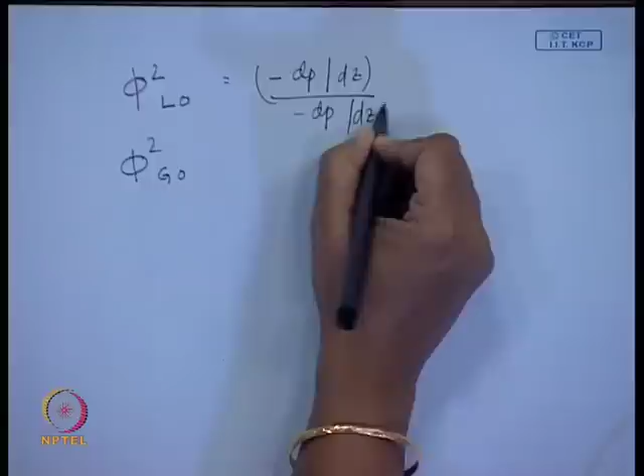The first one was phi square LO. Remember, these subscripts we usually use as capital letters. Then there was phi square GO, usually used in terms of liquid. This is minus dP/dz divided by minus dP/dz when the entire mixture flows as liquid.

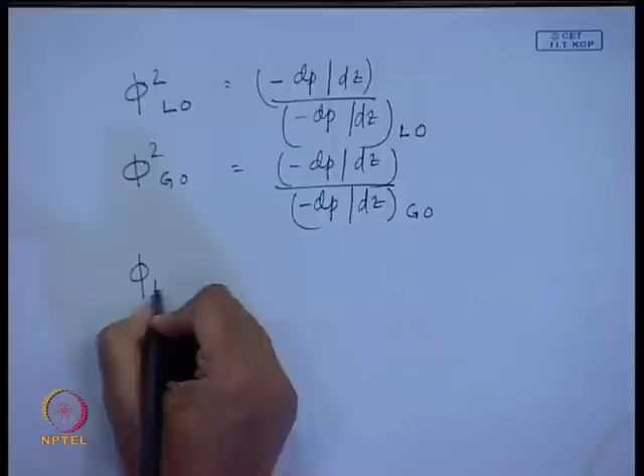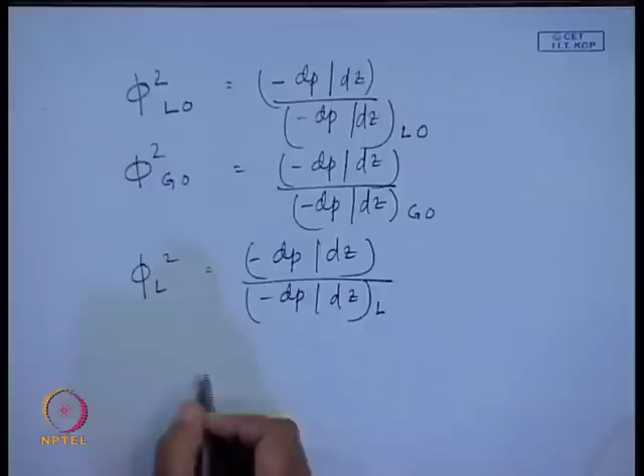Okay, then this was just from analogy, this was as a ratio of the entire mixture flowing as gas. And then we had phi L square, where the liquid portion of the mixture is expressed as a ratio of the liquid portion of the mixture flowing alone in the pipe, and phi G square, which is the gas portion of the mixture flowing alone in the pipe. So these were the 4 definitions that we had already given.

Now, at this particular juncture, I would like to mention that usually these correlations are expressed in terms of phi L square and phi G square. The basic assumptions on the basis of which the empirical relationships to find out the frictional pressure gradient are based include: constant but not necessarily equal velocities for gas and liquid phases, attainment of thermodynamic equilibrium between the phases, and use of empirical correlations or simplified concepts to relate the 2-phase multiplier as well as void fraction alpha to independent variables of flow.

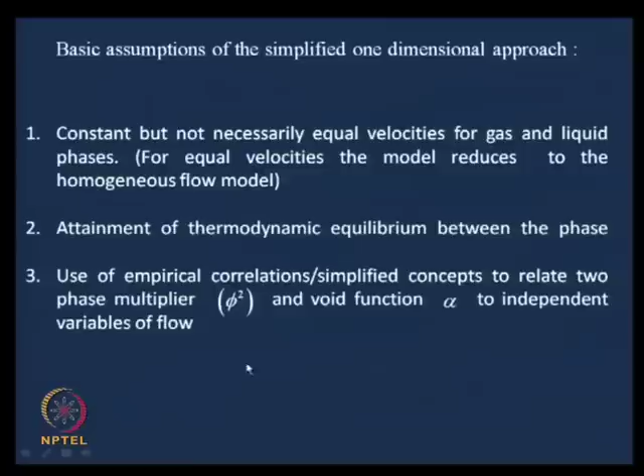So first we would like to relate the 2-phase multiplier, and naturally if the 2-phase multiplier is related with that particular parameter, alpha should also be related. Accordingly, we will find out empirical correlations to relate the 2-phase multiplier as well as the void fraction to independent variables of flow. Once this is done, we find that the frictional pressure gradient can also be calculated, and once alpha is known, rho Tp can also be calculated, u1 and u2 can also be calculated. So the frictional pressure gradient can be obtained from this particular equation.

Now here I would like to mention that out of the 4 definitions of phi square which we have written down just now, usually we adopt phi L square and phi G square, rather we correlate phi L square and phi G square for our purpose. We do not use phi LO and phi GO usually; those are used when we encounter change of phases or when there is boiling, condensation, etc.

When a single phase, say liquid, a saturated liquid or a saturated vapor is entering and change of phase occurs, under that condition, if we take phi LO square, phi GO square, it is much more convenient, because the liquid or the vapor was flowing alone in the tube at the entry condition. But under normal circumstances, when we are developing the 2-phase multiplier correlations from the separated flow model, we assume from the very beginning that both phases are present. In that case, we have found that it is much more convenient to use phi L square and phi G square. Why is it more convenient?

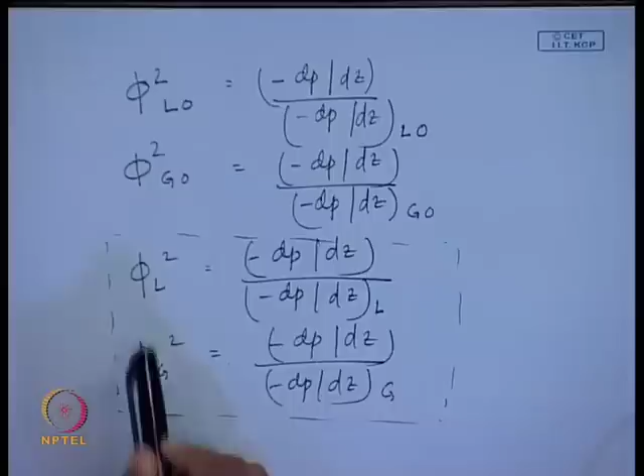Because we will soon see that these 2 multipliers conform to certain limiting conditions which are not obeyed by phi square LO and phi square GO. Just because of that, we would like to prefer, or we would like to correlate phi L square and phi G square. Now what are those limiting conditions? Let us see what are those limiting conditions.

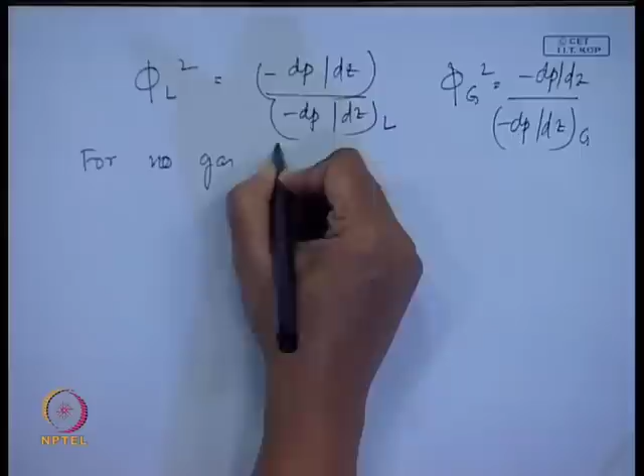Now, for no gas flow, what will you get? Let me write down the definitions once more. Phi L square equals minus dP dz by minus dP dz liquid, and phi g square equals minus dp dz by minus dp dz gas. Now tell me, for no gas flow, what will you get? What should be the value of phi L square and phi g square for no gas flow?

What is 1 by phi L square equal to for that particular case? Only for no gas flow, meaning only liquid is flowing. So 1 by phi L square will be equal to, since only liquid is flowing. So therefore, these are all two phase pressure gradient. Here also I would like to make the changes clear, they are all two phase pressure gradient. I am very sorry, in case I miss it, just remember that they are all two phase pressure gradient.

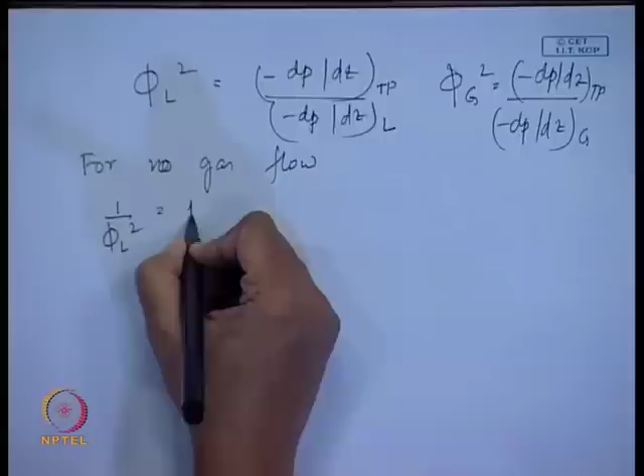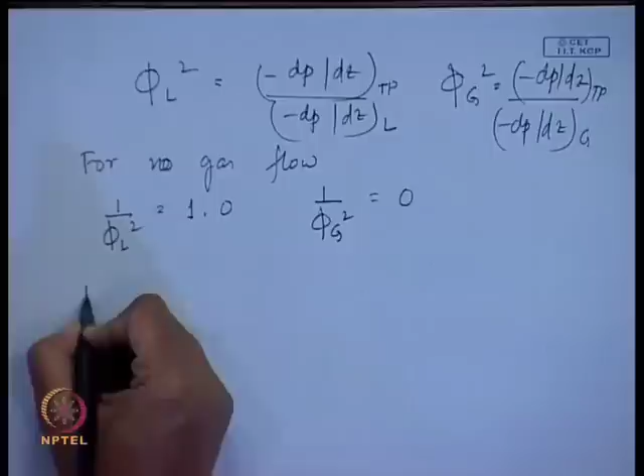Now, when there is no gas flow, naturally it is only liquid which is flowing through the pipe, isn't it? So therefore, under that condition, 1 by phi L square becomes 1.0. And what about 1 by phi g square? It becomes 0. Just for this reason I have defined them not as phi L square, phi g square, but as 1 by phi L square and 1 by phi g square. Similarly, for no liquid flow, I also have these cases in my presentation.

You can see the PPT which I have prepared. Here also for no liquid flow, naturally what do you have? It is 1 by phi g square equals to 1, and 1 by phi L square equals to 0.

Remember, these are limiting conditions which phi LO square and phi GO square would not have conformed to. When there was no liquid flow, we would find there would be some value of phi square LO, because we assume the entire mixture is flowing as liquid. So when there is no gas flow, the liquid flow would be there. Such limiting conditions would not have been subscribed by your phi square LO and phi square GO.

Another limiting condition that is also obeyed by this is the relationship between phi L square and phi g square at the critical point. All of you know what is the critical point? What happens at the critical point? The two phases cannot be distinguished at the critical point, that is the definition. Why does that happen? Rho 1 becomes equal to rho 2, mu 1 becomes equal to mu 2, and therefore all the properties of the two phases become identical. Now let us see how the relationship between phi L square and phi g square change at the critical point.

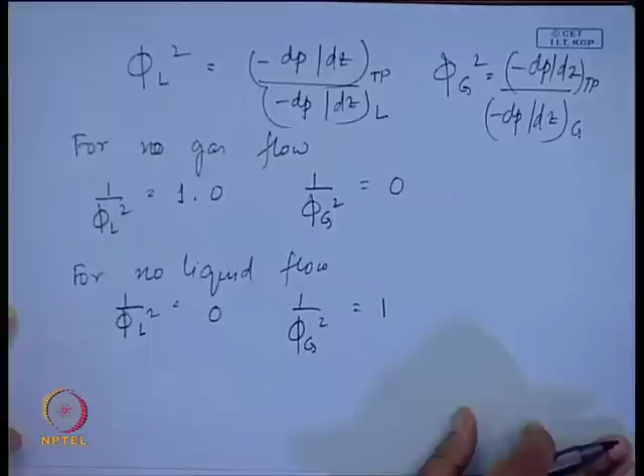Now what is the basic definition of these two? Let me complete it. This was 1 by phi L square equals to 0, and this was 1 by phi g square equals to 1. Now at the critical point, what do you get? Let us first find out the expression, and then we will be substituting the expressions for the critical point.

So what is the definition of phi L square? It is, as I have just now written down, the two phase pressure drop divided by the pressure drop when the liquid flows alone in the pipe.

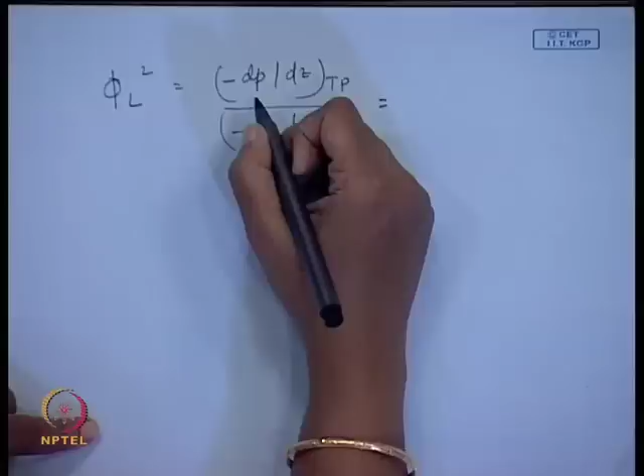Now if we substitute the basic definition, there is one more thing I had forgotten to mention. These empirical approaches have been derived under certain conditions: no phase change, no acceleration pressure drop, and negligible body force effects. That means for a horizontal pipe under isothermal two component flows. Do you agree with me? It has to be a horizontal pipe under two component isothermal flow.

Yes or no? So if that is the case, then your g cos theta term cancels out. There is no acceleration pressure drop, this term cancels out too, and therefore under that condition your pressure gradient comprises only of the frictional pressure drop. So these correlations, most of the empirical approaches, have been developed under conditions of no phase change, no acceleration pressure drop, and negligible body force effects, under which we can write it down.

Under this condition we can write minus dp dz two phase. This comprises of minus dp dz frictional component of the two phase. Later on some modifications were made to incorporate effects when body force effects and acceleration pressure gradients become important, but naturally, the more important they become, the less accurate these correlations become. So under this particular condition the correlations were developed.

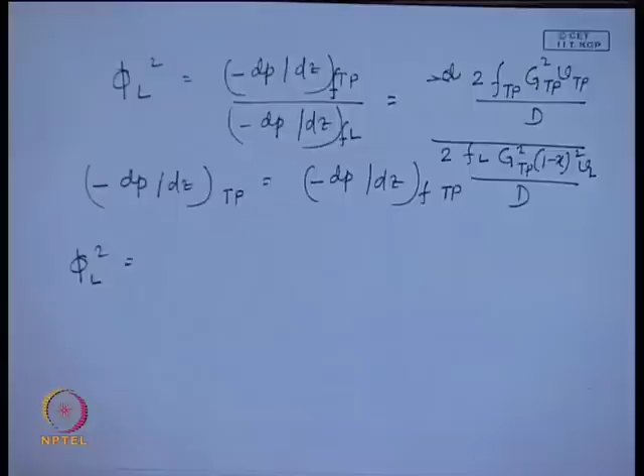Fine. In the same way, your minus dp dz frictional for the gas phase can also be expressed similarly. So we find the expression of phi L square when these assumptions, which I have written down in my transparency, are applied. Under these assumptions, these terms cancel out, and d cancels out. So this reduces to FTP Vtp by FL into 1 minus x square VL, yes or no?

Is this portion clear to all of you? Fine. Now, at the critical point, what do you get?

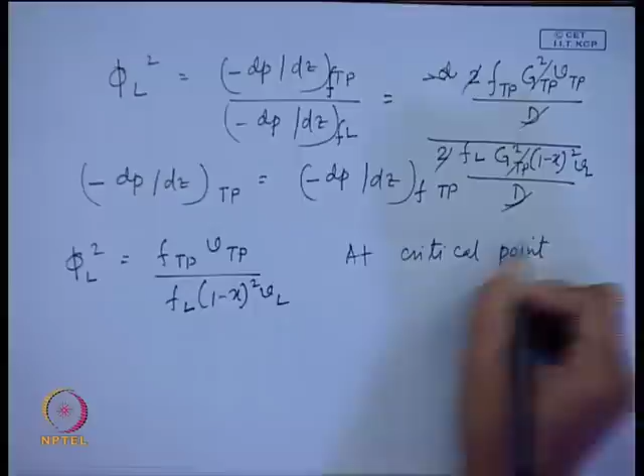At critical point, what do you get? Rho 1 equals to rho 2, or V1 equals to V2, isn't it? So, therefore, VL equals to Vg equals to Vtp, yes or no? So, therefore, these two also cancel out. Do you get this?

Right, so therefore this becomes FTP by FL into 1 minus x whole square. Now, what is the expression of FTP? Can you tell me? This FTP, this is a function of...

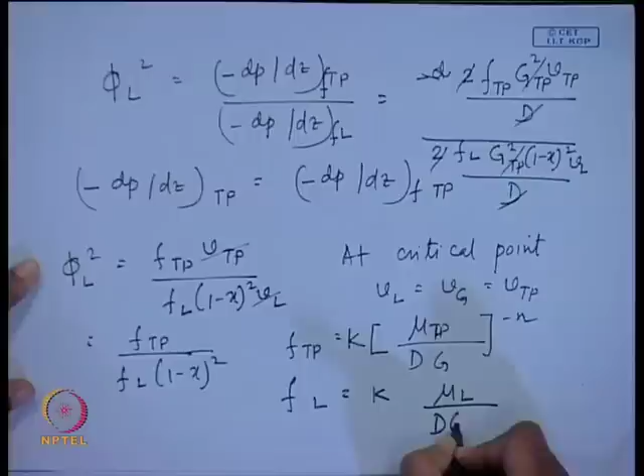Reynolds number. Okay, so therefore this becomes a function, or this is k mu Tp by dg whole to the power minus n. You agree? Same way FL, this is equal to k mu L by, we can write it in this dg into 1 minus x whole to the power minus n, yes or no?

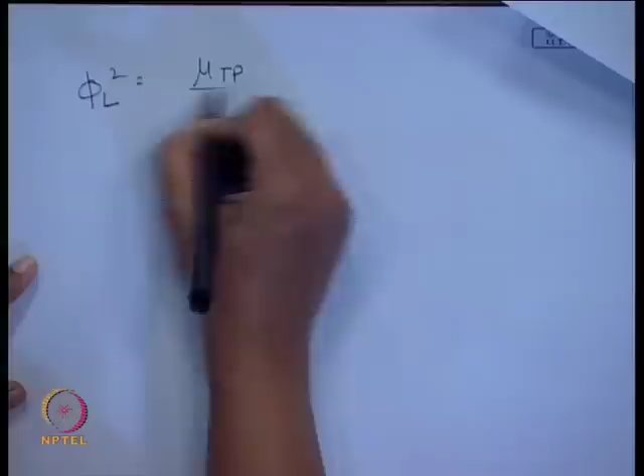So, therefore, here we can write it down as this is equal to - I have to shift to the next page - this is equal to phi L square, this is equal to mu Tp by dg whole to the power minus n, divided by mu L by dg into 1 minus x whole to the power minus n, 1 minus x square. This is the relationship which we get.

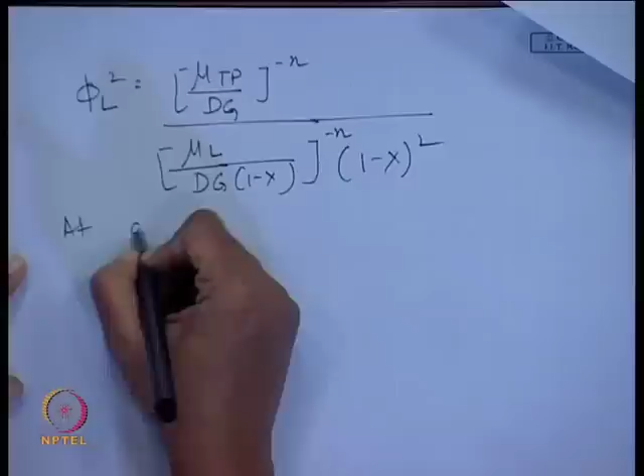Again at the critical point, we know mu 1 equals to mu 2 equals to mu Tp. So, therefore, at critical point what do we get? Mu Tp's, the mu's cancel out, dg they also cancel out. Okay, fine. So, what is the final expression that you get for this particular case?

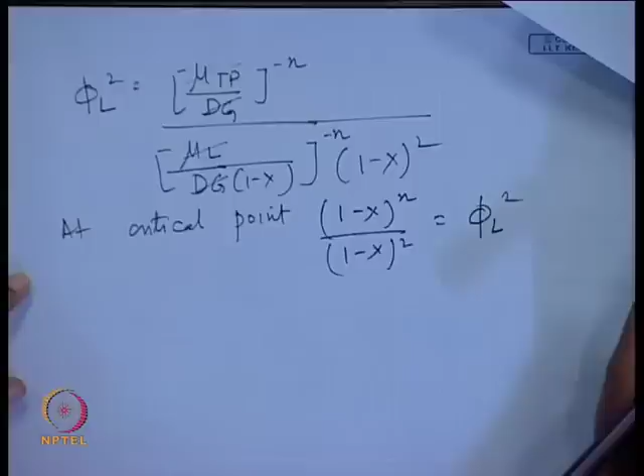It is 1 minus x whole to the power n by 1 minus x square. This is equal to phi L square. Yes or no? Just check up whether I am doing things correctly or not. Similarly, phi g square, what will you get? For phi g square, it is going to be x to the power n by x square, will be equal to phi g square. So we find that phi L, the relationship between...

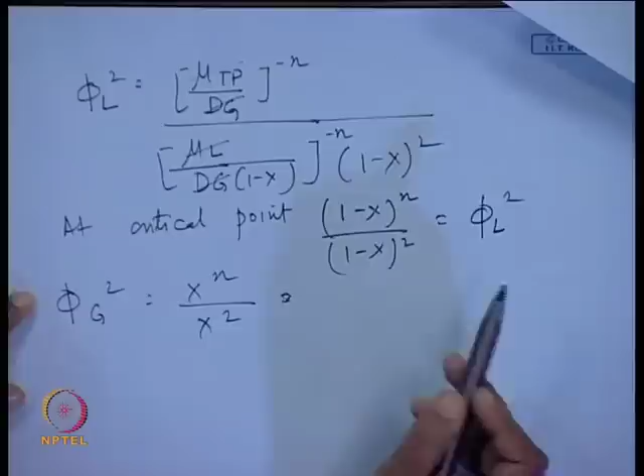Minus - what happened? It is all right only, isn't it? Oh sorry, now here also I made this mistake, isn't it? Minus n, sorry, very sorry. Okay, in other words, you can just write it down as minus n plus 2.

Okay, so therefore what do we find? That the relationship between phi L square and phi g square, at the critical point, will depend on whether the flow is laminar or turbulent. Because we find that both at the critical point, the phi L square, it is a function of x and n, isn't it? And in this particular case also it is a function of x and n. So, therefore, the relationship between phi L square and phi g square at the critical point will depend upon whether the flow is laminar or whether it is turbulent.

If it is laminar, then what do we get? For laminar flow, n equals to 1, very correct. So, therefore, phi L square will be equal to - come on - phi L square, it is going to be 1 minus x, 1 minus x only, whole to the power minus 1. Check it up, check it up.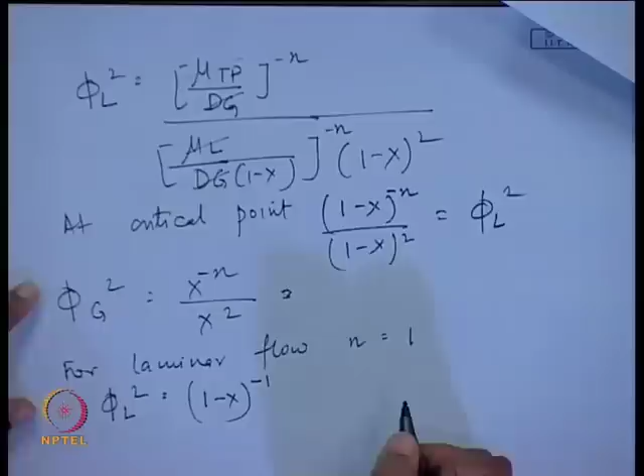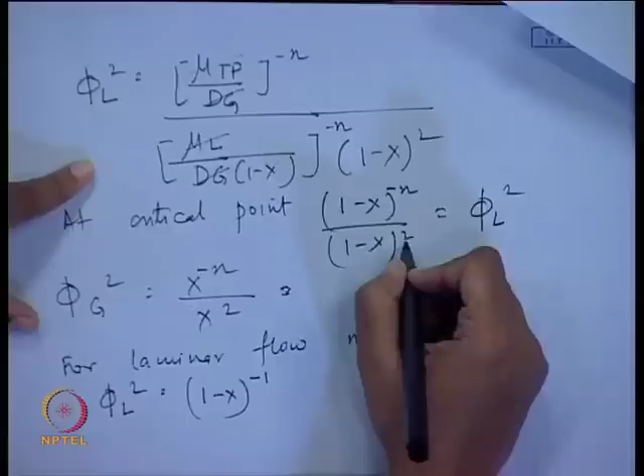How can it be minus 3? Just check it. N is 1, so therefore this is 1 by phi L square if I make it, then in that case, okay, let me make it 1 by phi L square, then this is going to be 2. Just then probably I have made a mistake, let me just check up, maybe somewhere there is a mistake which I have made. FL by FTP, what did I get?

There probably I have made a mistake. So suppose I start from the very beginning for the laminar flow, then this becomes minus 1. Suppose for laminar flow, if I start from the very beginning, okay, so phi L square becomes - this is minus 1, this is minus 1 - and then in that case we get f by FTP. In this particular case, what do we get? FL by FTP, this is equal to 1 by 1 minus x, very correct. Okay, and in the same way, we will get - just a minute - where FL by FTP, next page. Oh, here, no?

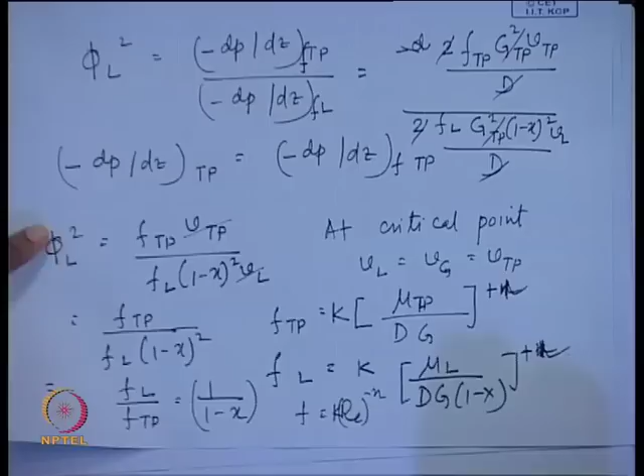No, here only I had made a mistake. Sorry, very sorry, here only I made a mistake, just a minute. This FTP equals to K RE to the power minus n. I have written 1 by RE, there only I had made a mistake. This is 1 by RE I have already written, so therefore it has to be plus. None of you pointed out the mistake. From here itself I had started making the mistakes. So, therefore, this has to be plus n. Is it correct? Because the relationship is f equals to K RE to the power, I had already written 1 by RE in this particular case. There actually I made a mistake. I am very sorry about it. So, very sorry, very sorry. Now it is all right, is not it?

Very sorry. So, therefore, phi L square, this is equal to 1 minus x to the power n minus 2. Or in other words, 1 by phi L square, this is going to be 1 by 1 minus x whole to the power n minus 2, correct. And phi g square will be x to the power n minus 2, very true. I have just made it the denominator. And this one is going to be 1 by phi. I am writing it as 1 because these two relationships will come out in a very straightforward manner, fine.

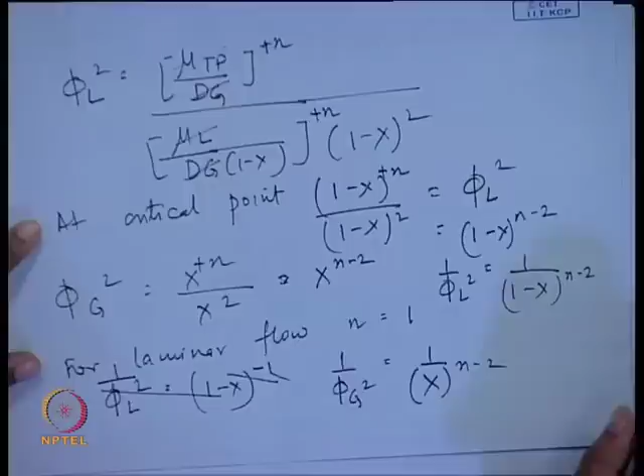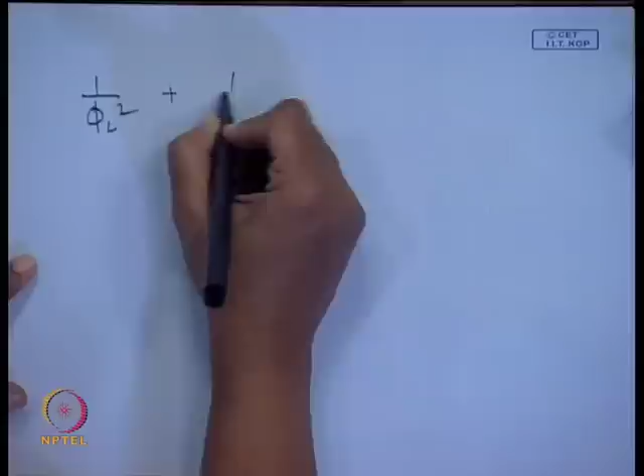Now, for laminar flow, what do you get? For laminar flow, your n equal to 1, is not it? So, when you get n equal to 1, then in that case what do you get? One by phi L square. So, therefore, you just do it and then you see how are you getting plus, you added 1 by phi L square plus 1 by phi g square. This what are you getting? This will become 1 minus x plus x equal to 1 for laminar flow, correct.

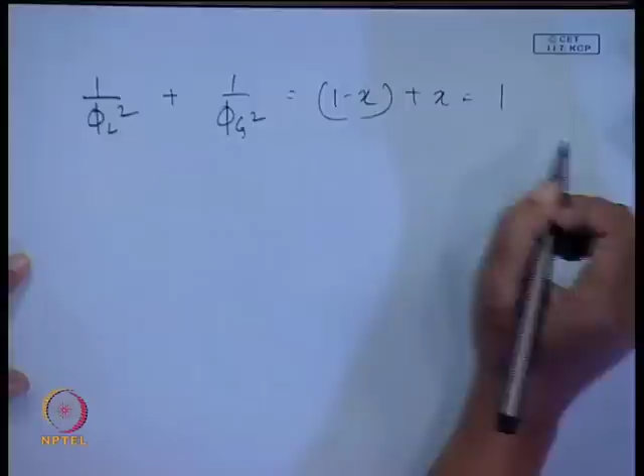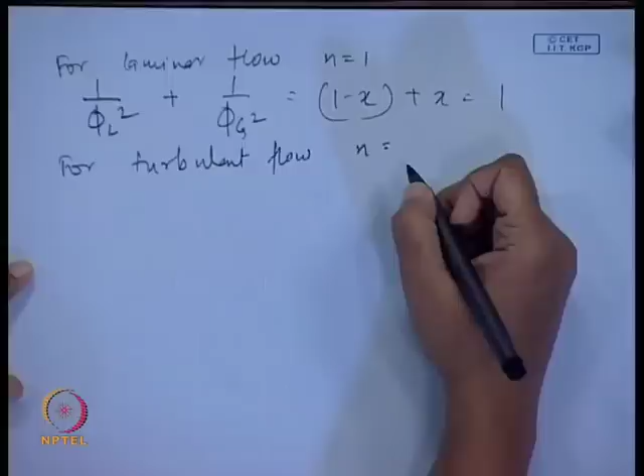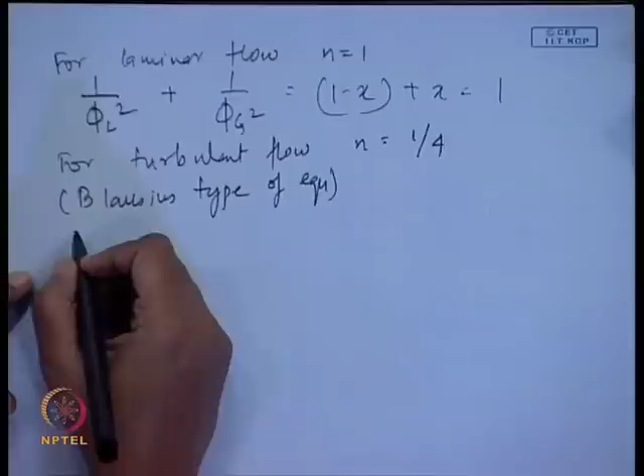For turbulent flow, suppose you, this is for laminar flow, n equals to 1. Now, for turbulent flow, what will you get? Turbulent flow, n equals to, generally for Blasius type of equation, if we use, then this n equals to usually 1/4, is not it? So, if you substitute that, then in that case we find that if you just do it, we just calculate 1 by phi L square whole to the power 4 by 7 plus 1 by phi g square whole to the power 4 by 7.

So, that we can have a 1 at the end, just for that reason. If you just calculate it you can find out what is the thing that you are getting, this will become 1 by, suppose in this particular case we know 1 by phi L square was 1 by 1 minus x whole to the power n 1/4 minus 2, is not it, plus 1 by x to the power 1/4 minus 2. So, in that case you do, it is going to be 7 by 4, 7 by 4. So, therefore, this becomes equal to 1.

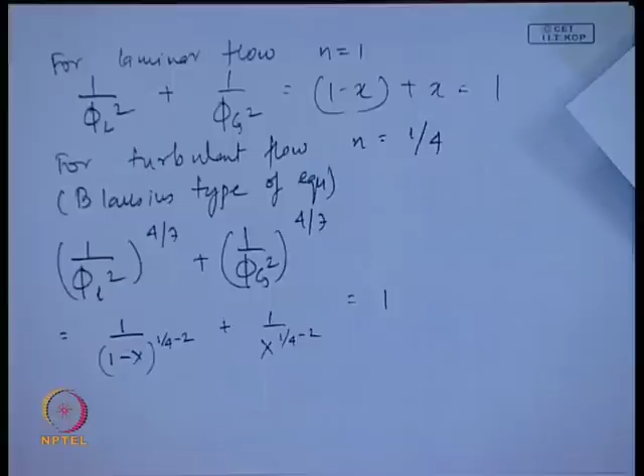So, now is it clear what are the limiting conditions to which the relation between phi L square and phi g square they conform to? The limiting conditions are, in a nutshell, for no gas flow 1 by phi L square equals to 1 and 1 by phi g square equals to 0. Confusions remaining now also? Just do the derivation. These are small derivations, these have come just from single phase fluid flow. There is nothing two phase in this, but please remember, whenever you are doing any derivation for your exams or something, please remember that start from the very basics, start from the definitions, and then we are going to proceed.

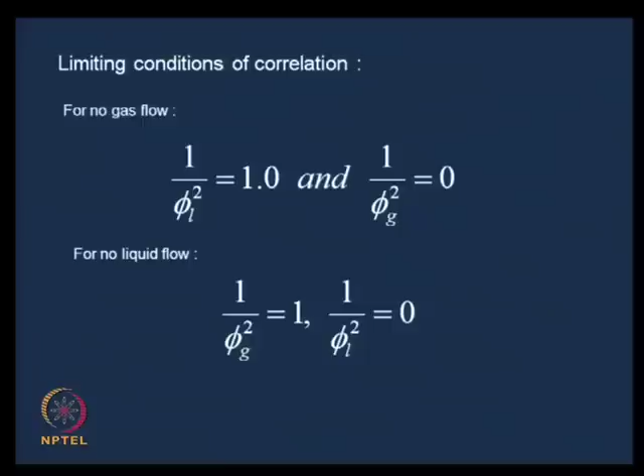Remember this. So, in a nutshell, what are the limiting conditions of the correlation? For no gas flow, 1 by phi L square equals to 1, 1 by phi g square equals to 0. For no liquid flow, 1 by phi g square equals to 1 and 1 by phi L square equals to 0. And at the critical point, we have two different relationships depending upon whether the two phases are in laminar flow or in turbulent flow. For laminar flow, as it is very evident, it is 1 by phi L square plus 1 by phi g square equals to 1. For turbulent flow, assuming a Blasius type of relationship, we get 1 by phi L square to the power 4 by 7 plus 1 by phi g square to the power 4 by 7 equals to 1. So, remember one thing, we have started deriving the relationships between the two phases. Yeah, these things more or less has been covered.

So, we have started deriving the relationships between the two phases, phi L square and phi g square, just because we know that from the very beginning both phases are going to be present. Phi L square and phi g square conform to certain limiting conditions to which phi LO square and phi GO square do not conform, and the limiting conditions are as we have derived.

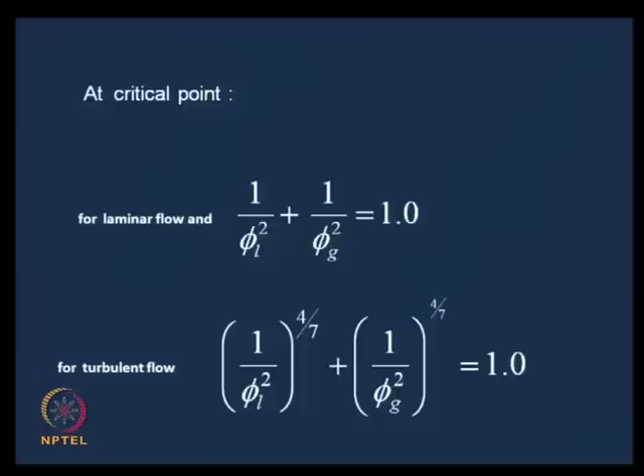Now, based on these facts, what has been done? Certain empirical correlations have been proposed. These empirical correlations have related phi L square and phi g square based on certain assumptions.

What are the assumptions that I have already mentioned? The first is that the empirical correlations have been derived for isothermal two-component flows in horizontal pipes, or more explicitly, for conditions where negligible body forces are there, no acceleration pressure gradient, no phase change, and the total pressure gradient comprises the frictional component only. Under these circumstances, these derivations have been made.

Now, the oldest and most widely used derivation, the first one made in this regard, was by a group of workers commonly known as Martinelli and Nelson co-workers, or Lockhart and Martinelli. These two persons first derived the empirical correlations, and subsequently there were several modifications, but the basic form has remained. So we will discuss the Lockhart and Martinelli correlation first, and then the modifications suggested to expand the range of applicability.

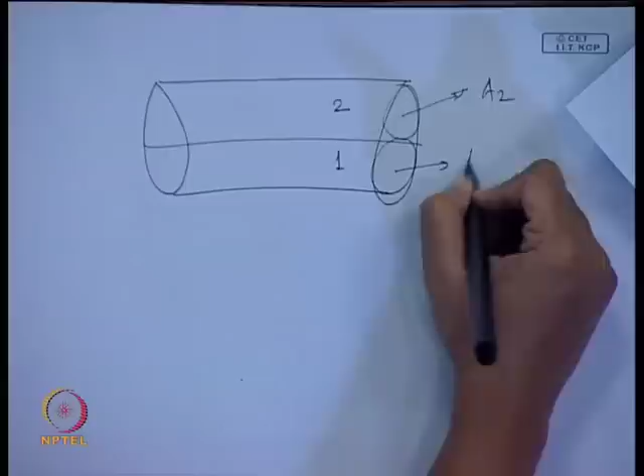Come to assumption 3: the pressure drop in each imagined cylinder is the same as in actual flow. It is quite natural. So imagine a pipe where fluid 2 is flowing here, fluid 1 is flowing here. We assume they are flowing in two separate cylinders, such that the cross sectional area of this and of this add up to form the total cross sectional area of the pipe, which is pi by 4 d square.

The next assumption is they do not interact at the interface. If they do not interact at the interface, that means they are flowing irrespective of the presence of the other; they do not know the other fluid is present. Under that condition, the pressure drop across cylinder 2 will be equal to the pressure drop across cylinder 1, which will be equal to the pressure drop across the total conduit. Yes or no? It's just like a parallel connection, the voltages are the same. This is just the same thing.

So, if you consider the second assumption, that the two phases do not interact with each other, then we find under that condition the pressure drop or pressure gradient across the entire cylinder will be equal to the pressure drop across the liquid cylinder, cylinder 1, which will be equal to the pressure drop across the gas portion. Now remember, we had already defined phi L square and phi g square, lots of definitions are coming into picture.

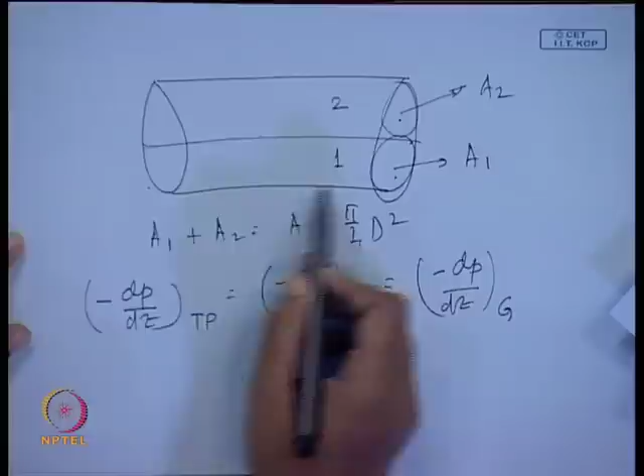If you remember, this L was when liquid was flowing alone in the pipe, and this was when gas alone was flowing in the pipe. Now, when we define this, this is the liquid portion when both phases are flowing together. So definitely the cross sectional area occupied in this case will not be equal to the cross sectional area occupied when the liquid portion is flowing alone in the pipe. Do you get it? So therefore, this dP/dz for L in combined flow and this dP/dz for L alone, these cannot be the same.

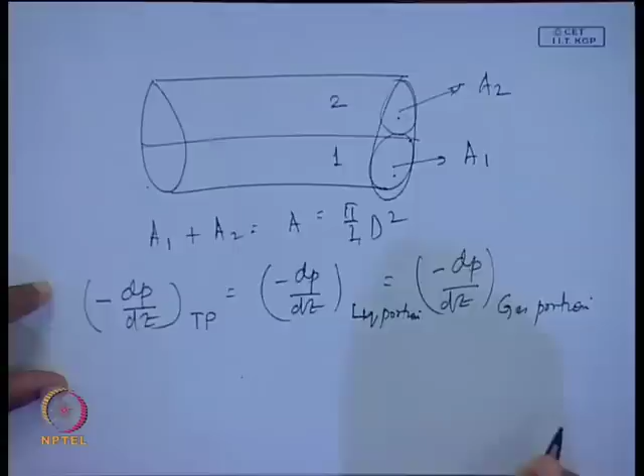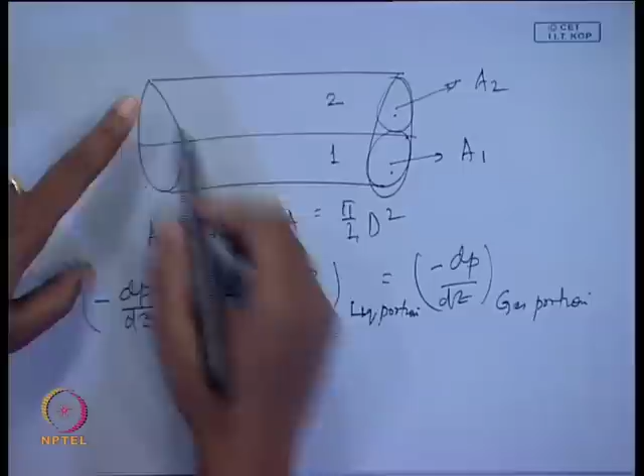So we have to remember this and denote it with a different nomenclature. We will just put it as liquid portion, gas portion—whatever you want, you can use your own nomenclature, it does not matter. But remember, the assumption is that the pressure drop in each imagined cylinder is the same as in actual flow. So the pressure drop refers to the pressure drop across the liquid cylinder, or in this case, across the gas cylinder.

And the pressure gradients which I defined for the two phase multipliers refer to the pressure drop which would be encountered when the liquid, which is flowing only in this portion, now flows through the whole pipe. Since they occupy different cross sectional areas, naturally the friction factor and everything changes, and so this particular pressure drop and that one are going to be completely different.

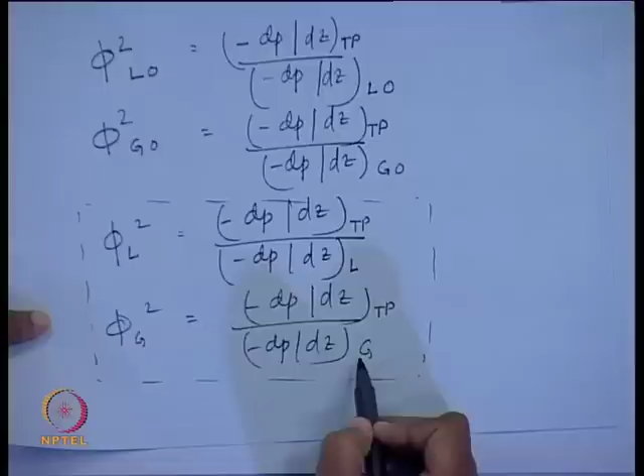This part you are supposed to remember. So there is a need—since we will be dealing with this much more—when liquid or gas flows alone in the pipe, they will be denoted by subscript capital L or capital G. And when it is the liquid portion which is flowing, we are going to call it either a liquid portion or a liquid cylinder, whatever it is. So this is the third assumption which we are going to give.

And the fourth assumption, which you already know, is that we assume the pressure drop is mainly due to the frictional component, which I have also put down in my PPT. So this is minus dP dz, and this primarily comprises the frictional pressure gradient. Is it clear?

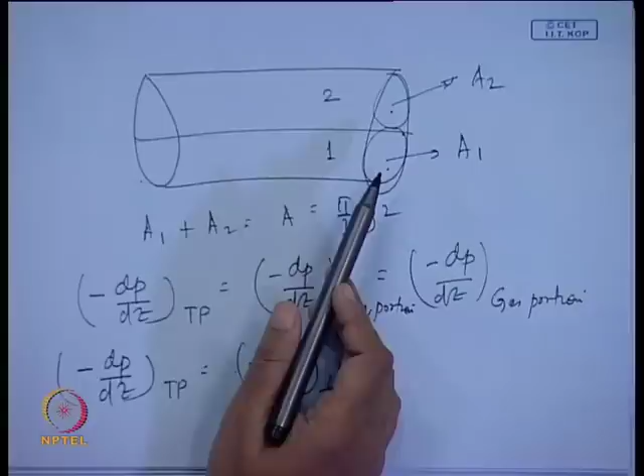Are these two assumptions clear? The first assumption is that flow is assumed to occur in two separate cylinders where the two cross sectional areas add up to form the total cross sectional area of the pipe. The second assumption is that the two phases do not interact with one another. Remember, this is the most severe assumption, and we will see at one point why it does not give completely accurate results.

The primary reason is assumption 2, which I have put down in my transparency—that the two phases do not interact with one another. If they do not interact, then naturally it is not two phase flow at all, because in the first class the definition I gave you about two phase flow is that it is the interacting flow of two phases. So remember, if that assumption is not valid, there is no point. This is the most severe assumption, and we will see it does not give completely accurate results. But for the time being, since the relationships will be derived based on curve fitting of large amounts of experimental data, more or less the relationships we get are accurate.

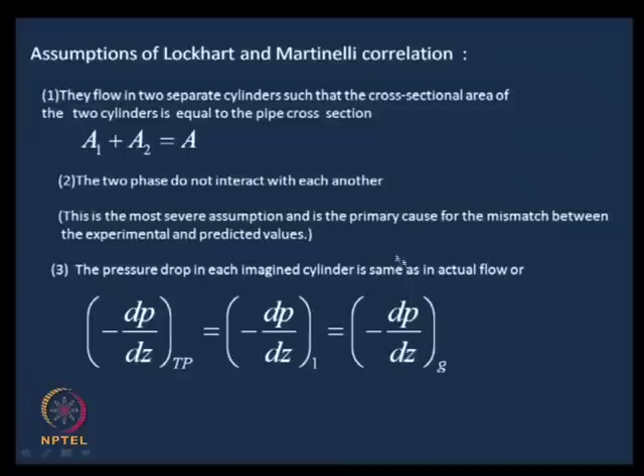So the next assumption is that the two phases do not interact with one another. Once this assumption comes into picture, the pressure gradient across the liquid portion or liquid cylinder will be equal to the pressure gradient across the gas cylinder, and that will be equal to the pressure gradient across the two phase flow, or across the composite gas-liquid cylinders. So the third assumption I have written is that the total pressure gradient is equal to the pressure gradient in each imagined cylinder. The third assumption is basically an extension of the second.

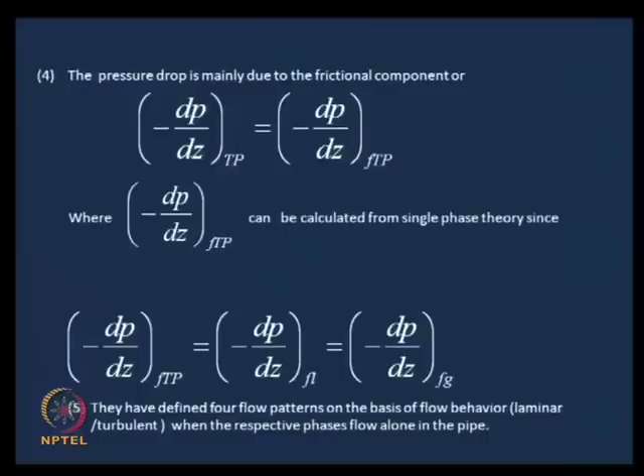So the next assumption is that the pressure drop arises mainly due to the frictional component. How did this assumption come up? Because these correlations were derived for two-component flows—air-water mixtures in horizontal pipes. So in horizontal pipes there was no gravitational component, and with a two-component air-water mixture there was no phase change, so no acceleration pressure gradient, and since they were in circular pipes, there was no area change either.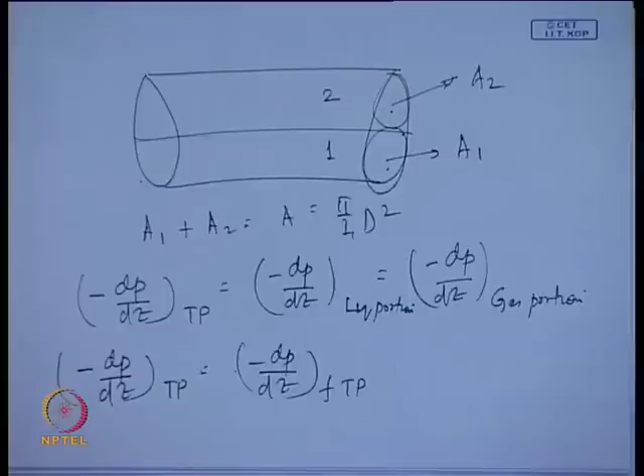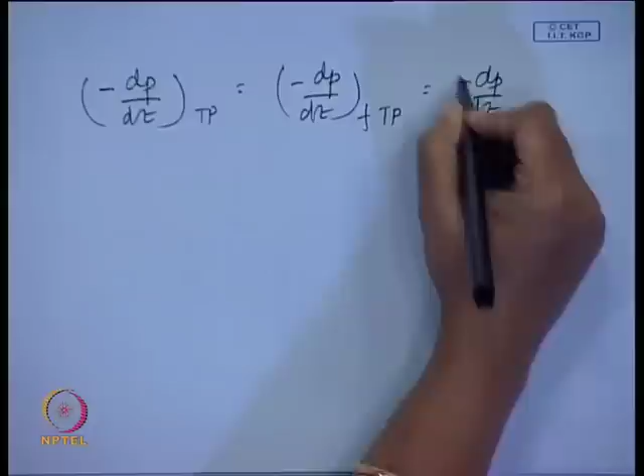So, the pressure drop is mainly due to the frictional component. In other words, minus dP dz Tp, as I have written down, will be equal to minus dP dz, the frictional component of the two phase mixture. Now, from this particular assumption and this particular assumption, what do we get? We get minus dP dz two phase, which is nothing but the frictional component of the two phase pressure gradient, equal to the frictional component in the liquid portion, which will equal the frictional component in the gas portion.

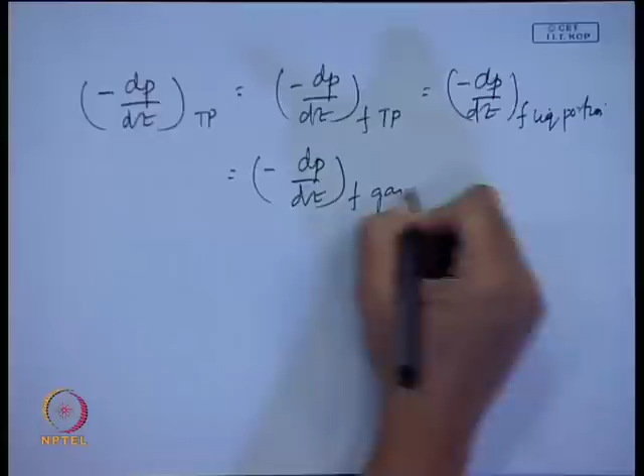So this is finally the final expression if we couple up all the assumptions which we have. Assumption 1 is this, assumption 2 is AL plus AG equals to A. And what is the next assumption?

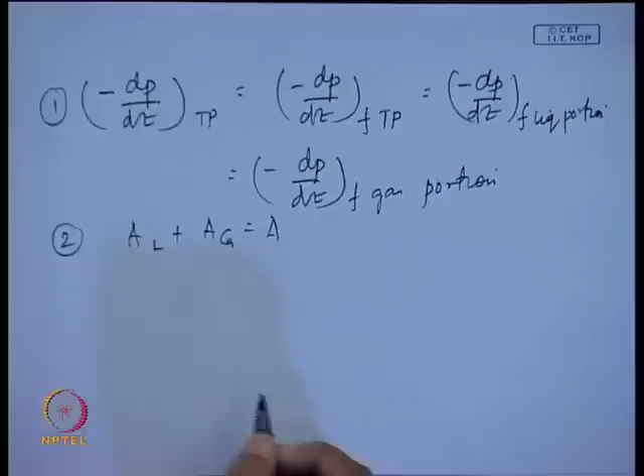In order to find out how to get your frictional pressure gradient, we assume that this frictional pressure gradient can be obtained if we know the frictional pressure gradient in the liquid portion. In the liquid portion it is simply single phase liquid flowing through the pipe, so this can be obtained from single phase flow equations. This can also be obtained from single phase flow equations, is it not.

So, under these two conditions, my phi L square, this was originally minus dP dz Tp by minus dP dz liquid. This becomes minus dP dz frictional Tp by minus dP dz frictional part of the liquid, because for liquid there is no acceleration, it is a horizontal pipe, so all those assumptions are applicable. In other words, this is nothing but minus dP dz frictional of the liquid portion divided by minus dP dz frictional when the same liquid flows alone in the pipe.

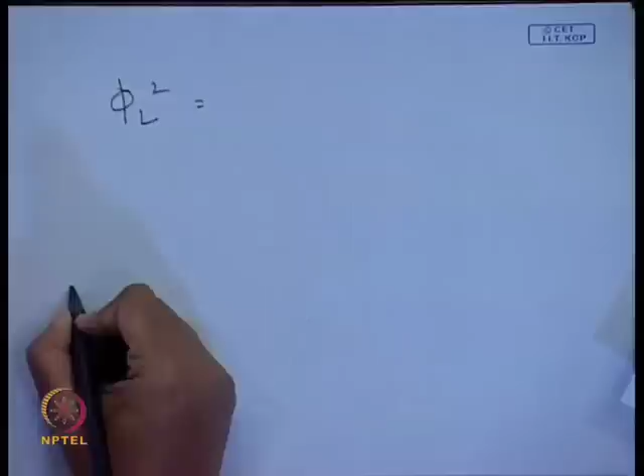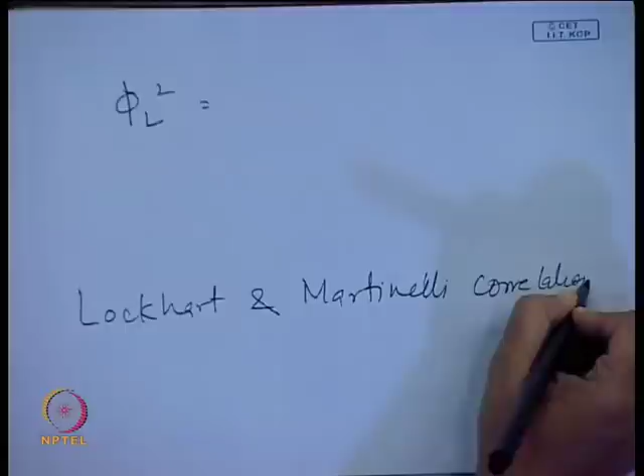I have arrived finally at the Lockhart and Martinelli correlation. Just remember, the first group which gave the correlation is the Lockhart and Martinelli correlation, or this is usually called the separate cylinder model. This is also known as the separate cylinder model.

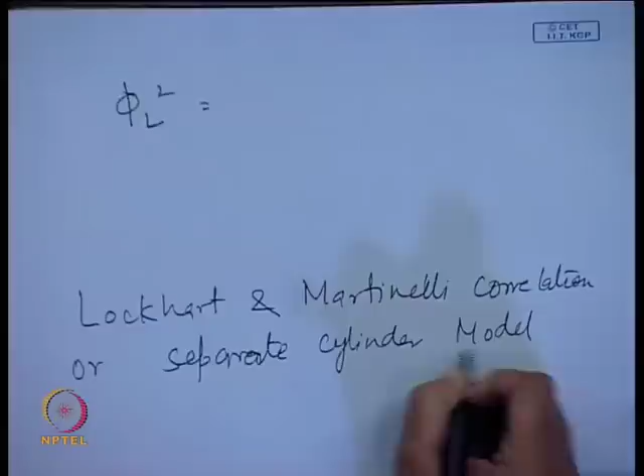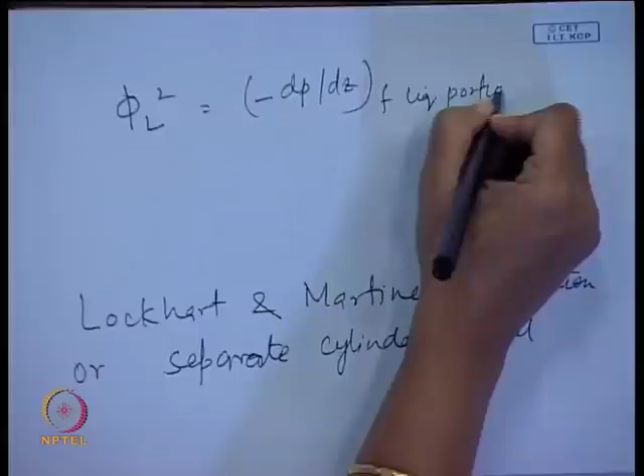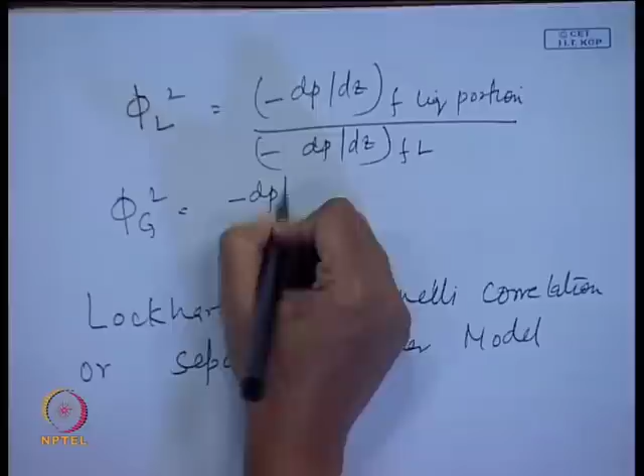So, from this model we get phi L square is nothing but minus dP dz frictional liquid portion of the pipe divided by minus dP dz frictional when that liquid flows alone in the pipe. Similarly, phi g square, this will be minus dP dz frictional gas flowing alone.

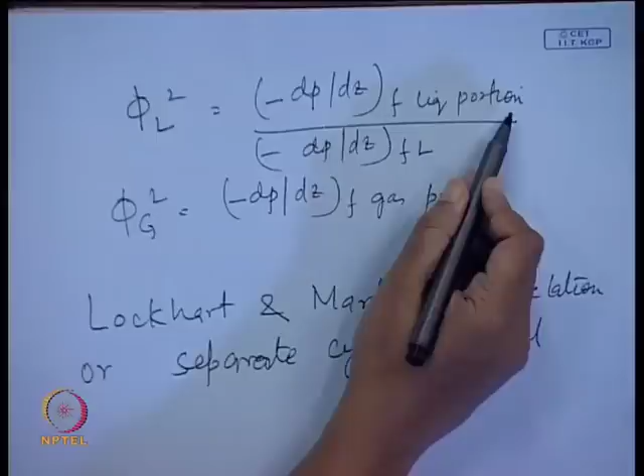See, the gas portion and liquid portion frictional components are equal, is it not? F gas portion and F liquid portion are equal, which I have already shown you here. Minus dP dz two phase frictional component is the frictional component in the liquid portion, which equals the frictional component in the gas portion. So, this therefore becomes minus dP dz frictional when the gas flows alone in the pipe.

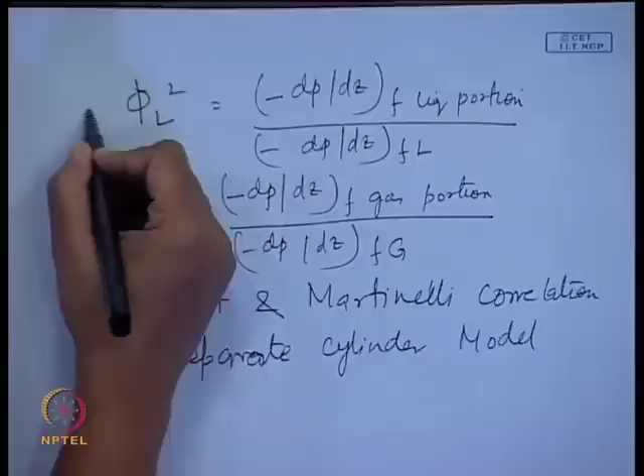So, what basically Lockhart and Martinelli did was propose a correlation based on the separate cylinder model, where they tried to correlate these two parameters, phi L square and phi g square. More or less the graphical correlation, if you see here, is something of this sort. They tried to correlate 1 by phi g square and 1 by phi L square. We will be discussing this graphical correlation, and then by some very simple analysis we can find the analytical expression for the family of curves shown here.

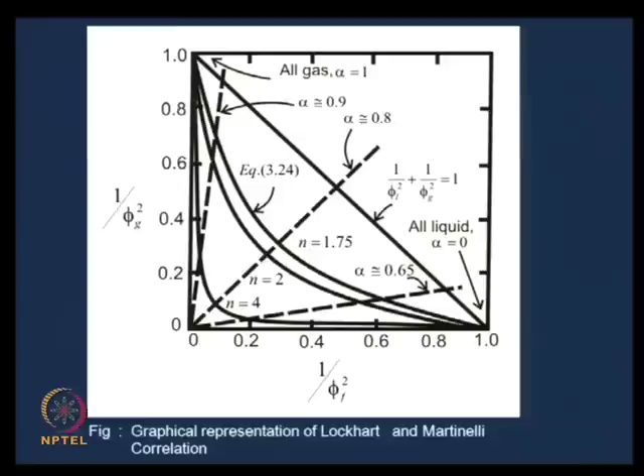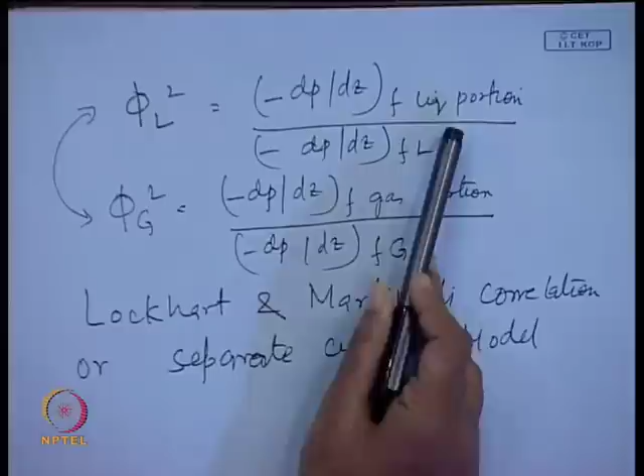So basically Lockhart and Martinelli stopped by proposing this graphical correlation, and subsequently other co-workers, Martinelli, Nelson, etc., proposed the analytical correlation simply by substituting minus dP dz F liquid portion and minus dP dz F when liquid flows alone in the pipe, correctly from single phase flow equations. They could arrive at an analytical expression relating phi L square and phi g square, and as is evident, this relation will again depend upon whether the two fluids are flowing in laminar flow, turbulent flow, or whatever it is.

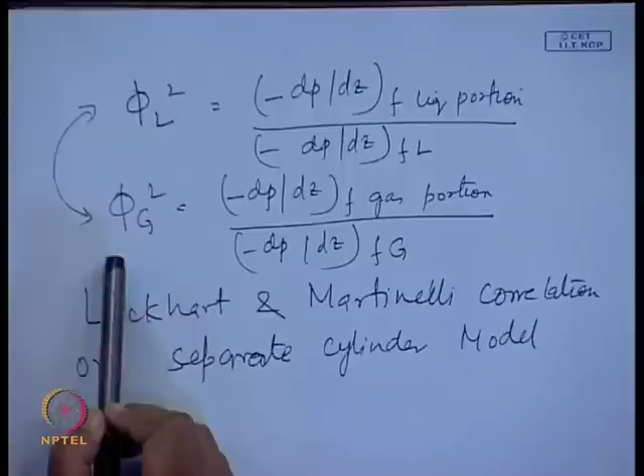So tomorrow we will continue our discussion regarding the Lockhart-Martinelli correlation, and then, if time permits, we will go on to the other modifications of the correlation.